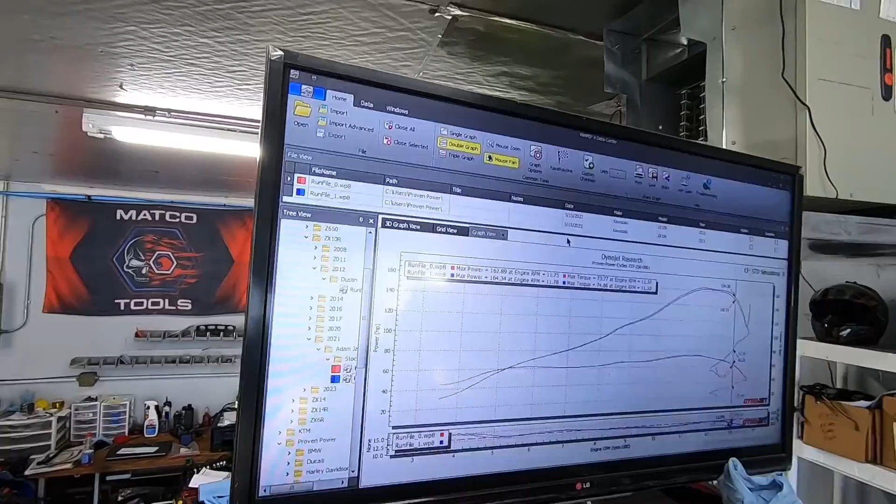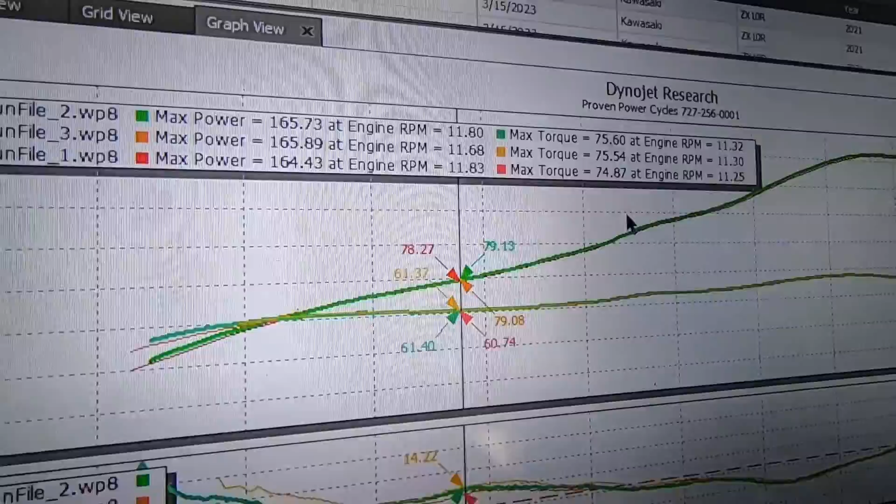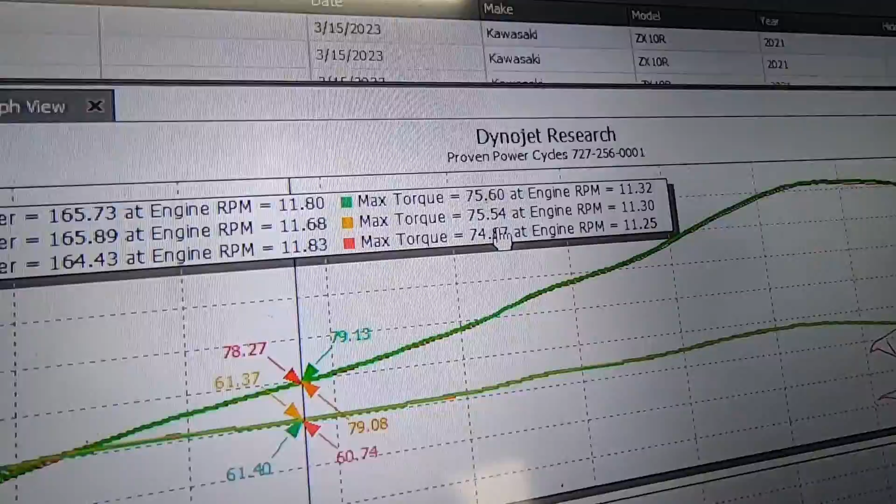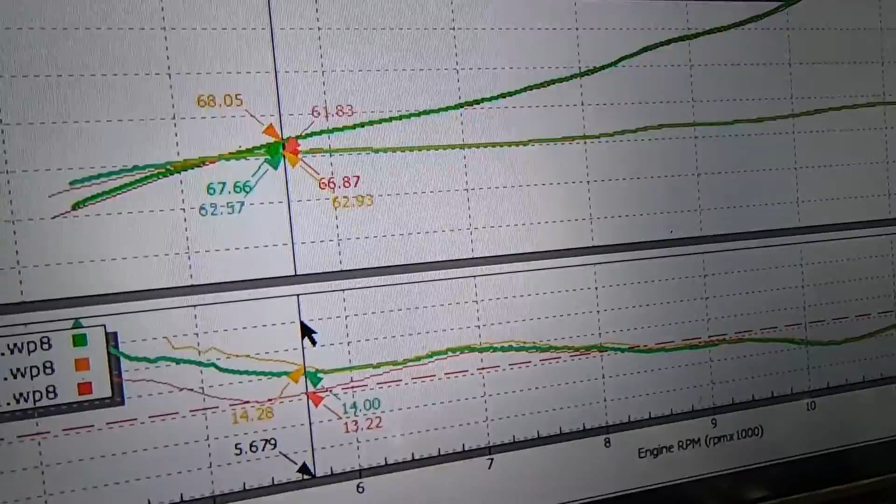We're done doing the baseline pulls on this thing. It actually ended up with 165, almost 166 wheel horsepower, and 75 foot-pounds of torque is about what we're averaging here. Not bad. Now take a look down low going into mid-range though. Look how lean the bike is. We're seeing 14.2, 13.9. Let's focus on the green and the yellow since that was the later pulls here that made the most power.

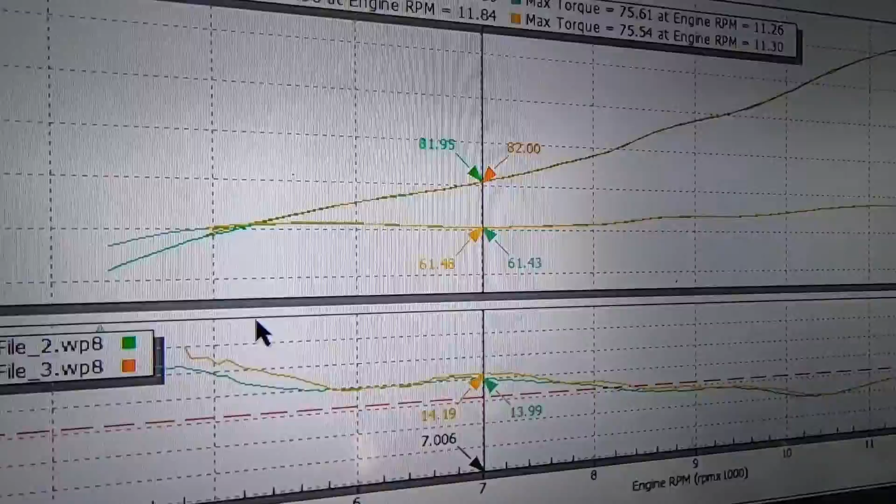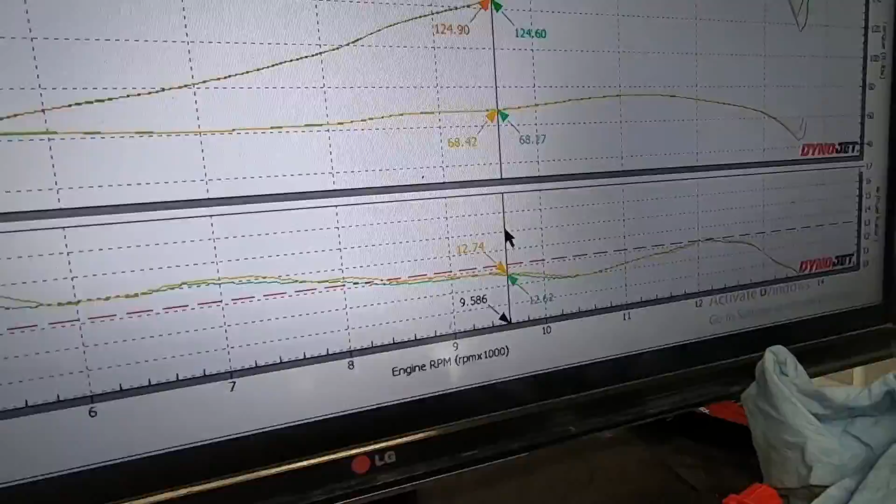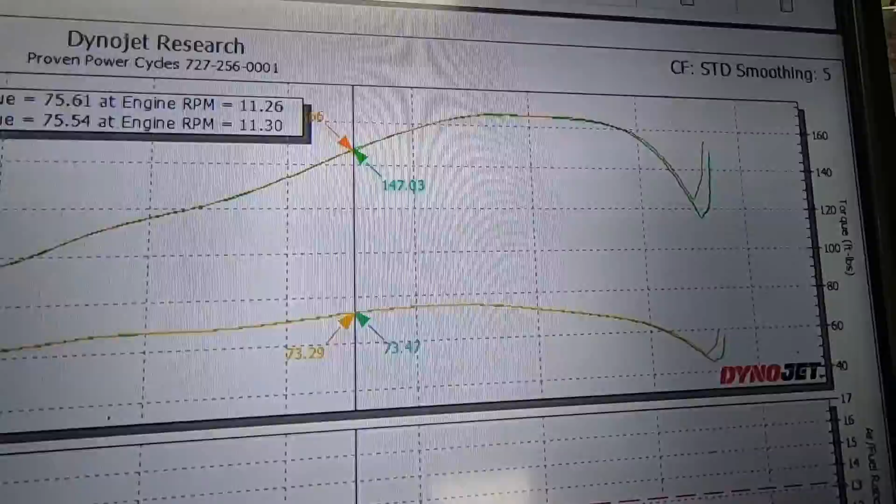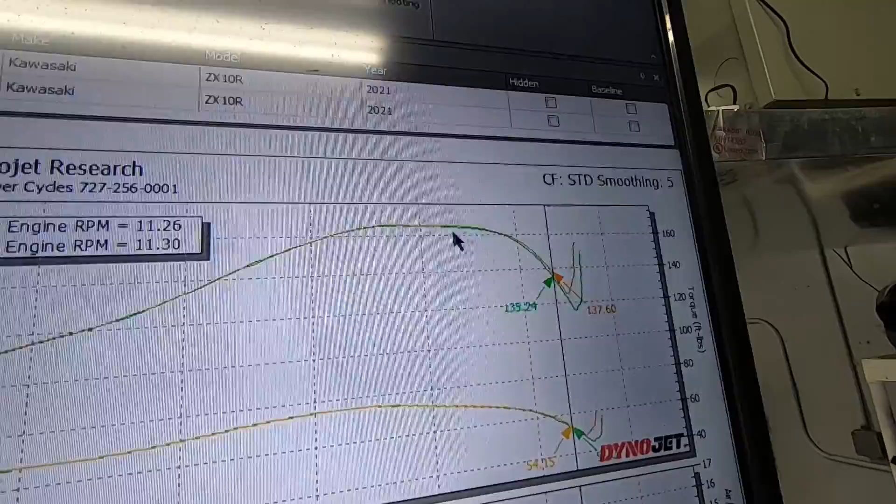Comes back up, gets right where it needs to be, and then again, it just starts puking fuel at the higher RPM, where also the throttle blades are getting shut simultaneously, and ignition timing, a bunch of stuff's getting restricted, so it just tanks the power. And that's why we get this little hilltop here, and then it drops off. It's just all the restrictions starting right around here at 11.5.

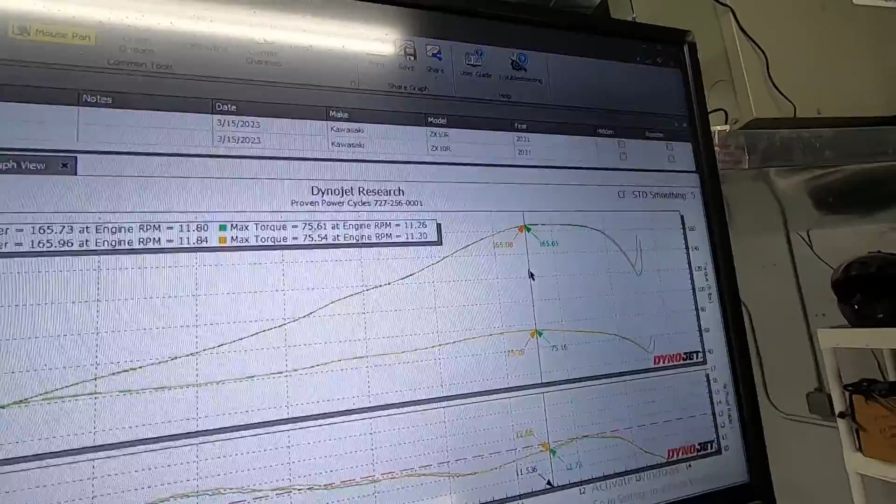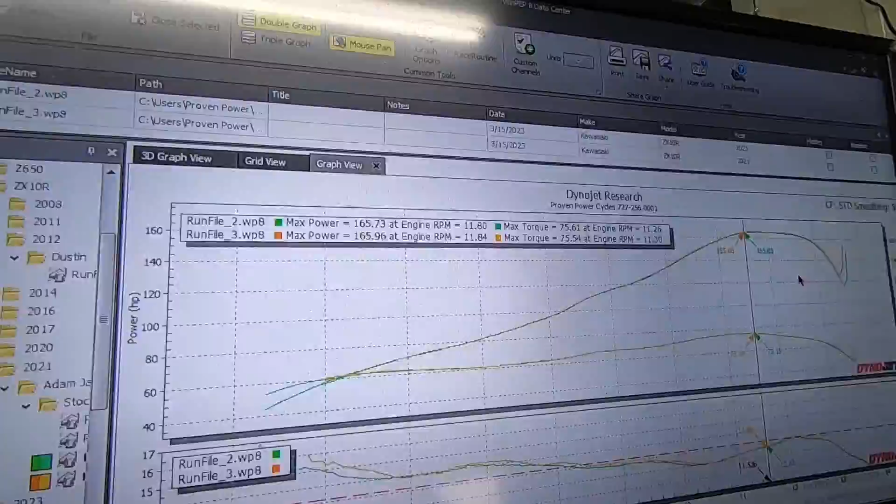So good numbers so far, a little lower than I was expecting or that I was hoping for. However, it's not where you start, it's where you end at. So stay with us. We're gonna transform these numbers for sure, and also we're gonna make this thing scream.

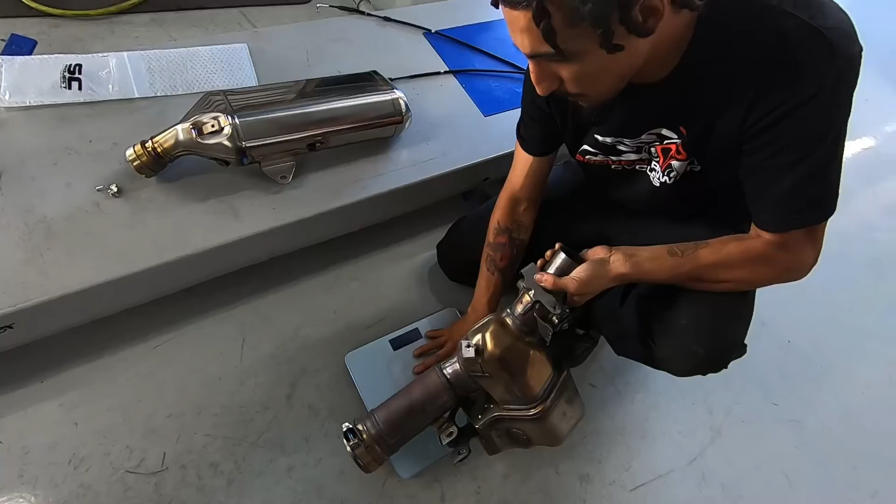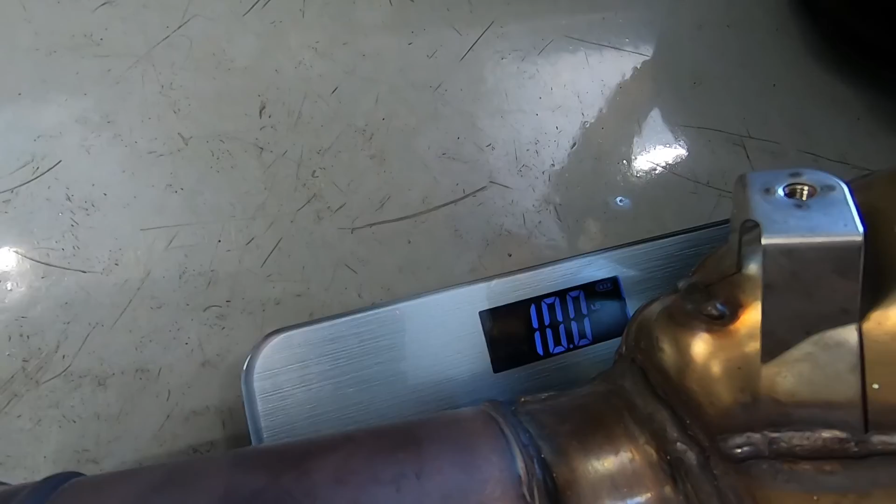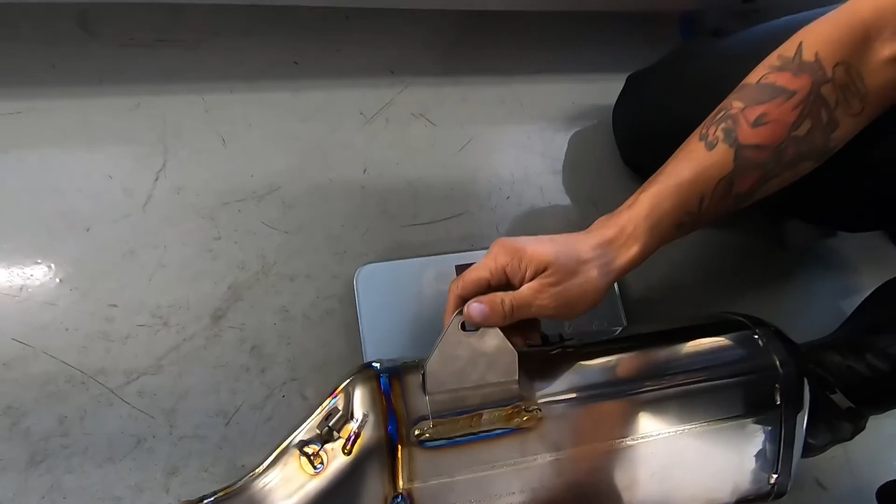So SC Project is a pretty loud exhaust. We thought it'd be interesting real quick to weigh the stock catalytic converter, and we are in at 10 pounds. So the stock cat weighs 10 pounds and we still have the muffler to weigh, so we're gonna go ahead and throw that on now. And here's the stock muffler, 5.8. So we have a total of 15.8 pounds. We also have the cables, a little bracket, and then we also have the motor.

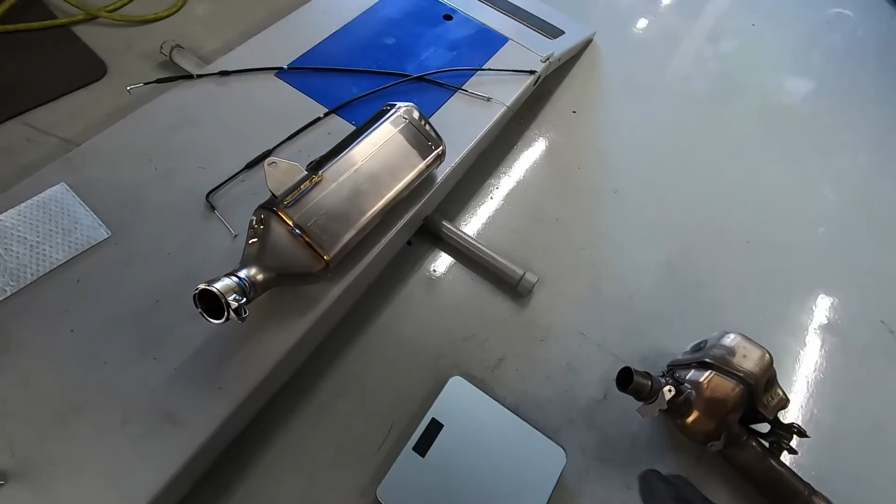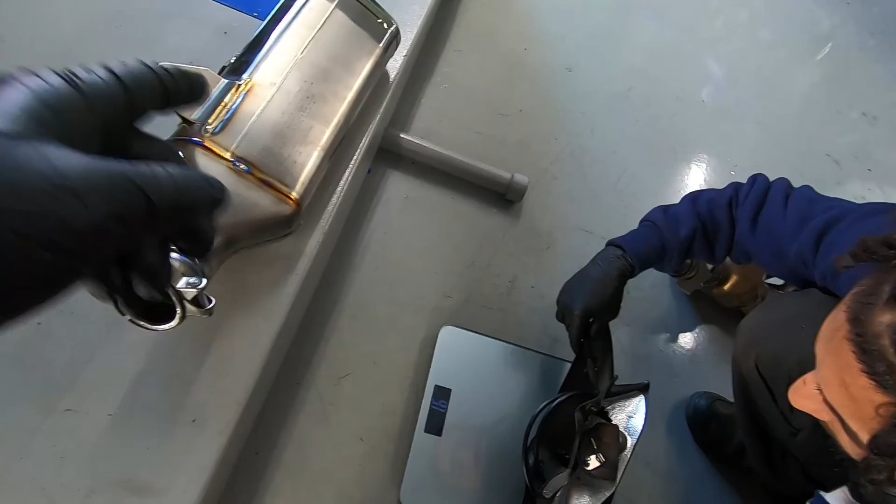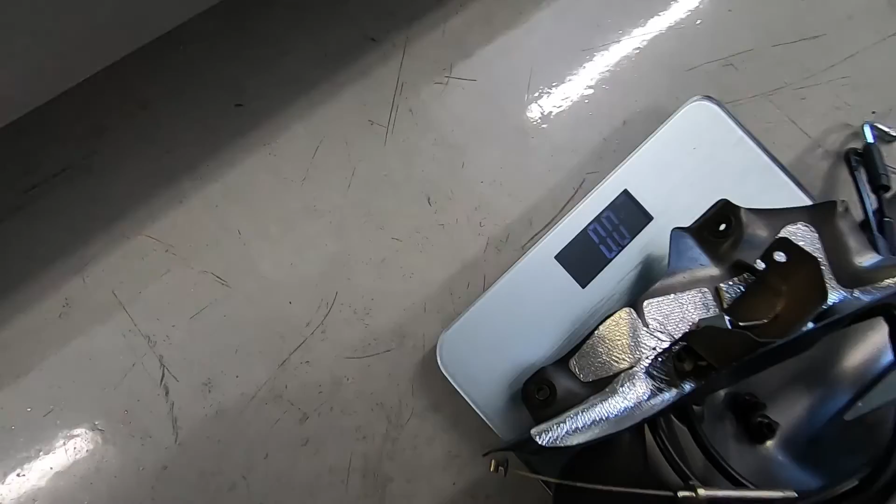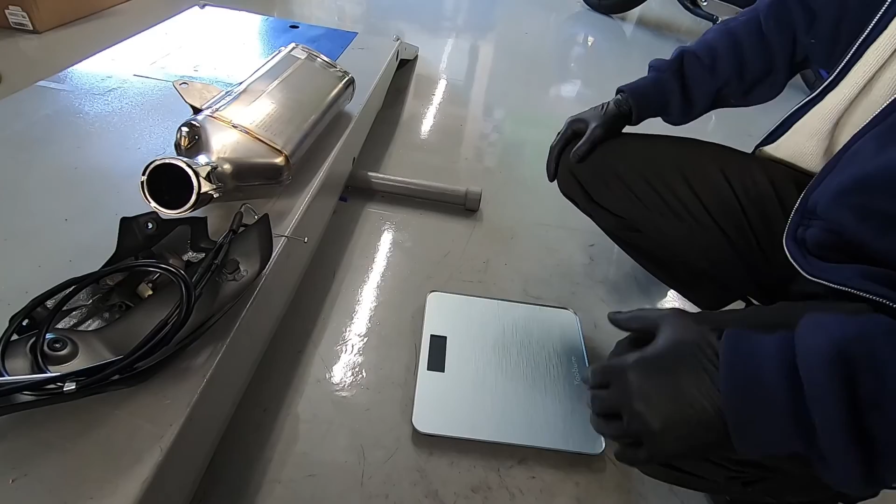So I'm pretty sure it's gonna be safe to say that overall, this is around 16 pounds, maybe even a little bit over 16 pounds worth of weight. We already measured 10 pounds on the cat. We measured 5.8 pounds on the muffler. And now we're gonna measure the rest of the hardware here. We're at 0.8, the battery's dying in it. We're at 0.8 pounds there as well. So you're at 16.6. So just a nip over 16.5 pounds that we have all right here.

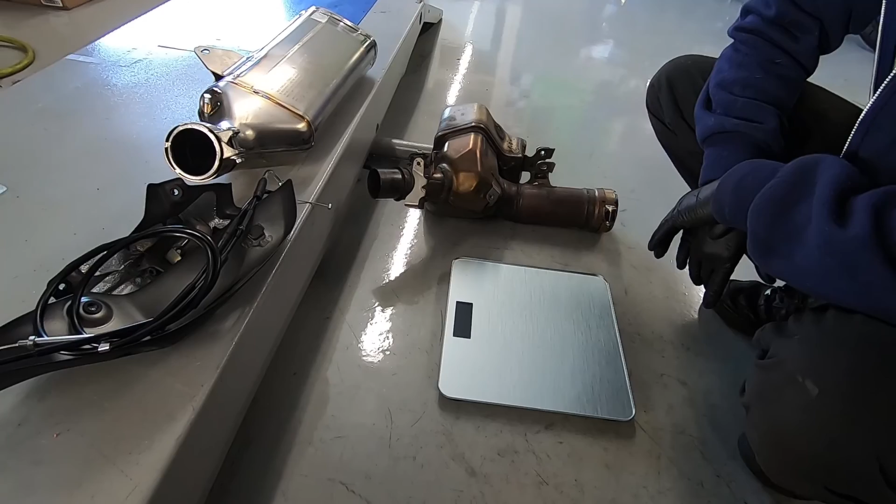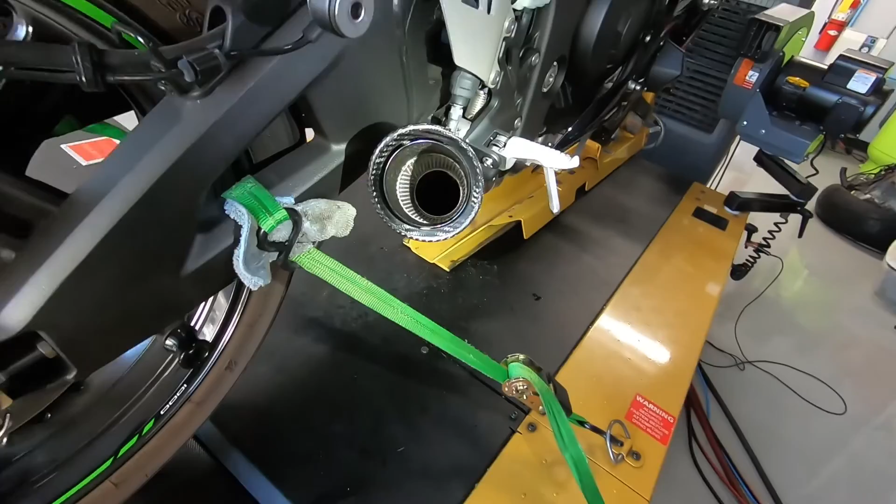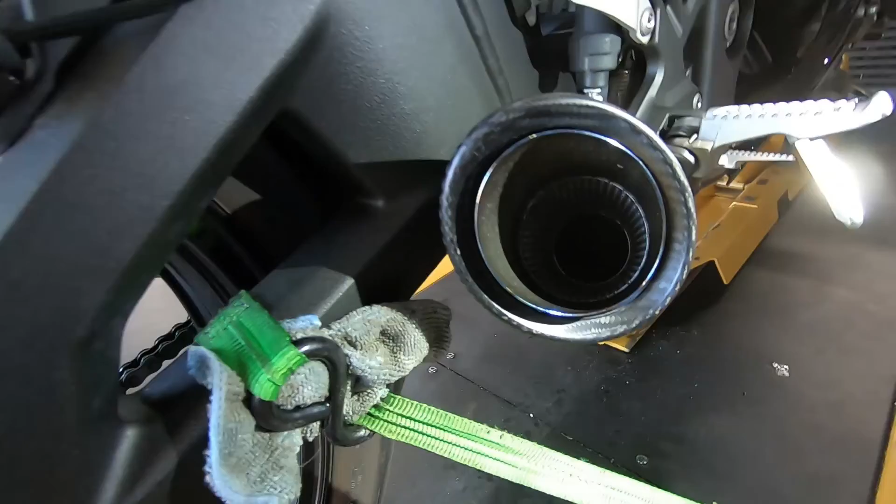That SC Project weighed in around a pound, total weight. So literally saving a good solid 15 pounds of weight right here, just on this little exhaust. That's wild. So this SC Project weighs less than a pound. There's literally nothing to this thing. It's a titanium slip-on, and there's literally no packing in here. This thing is going to be a screamer.

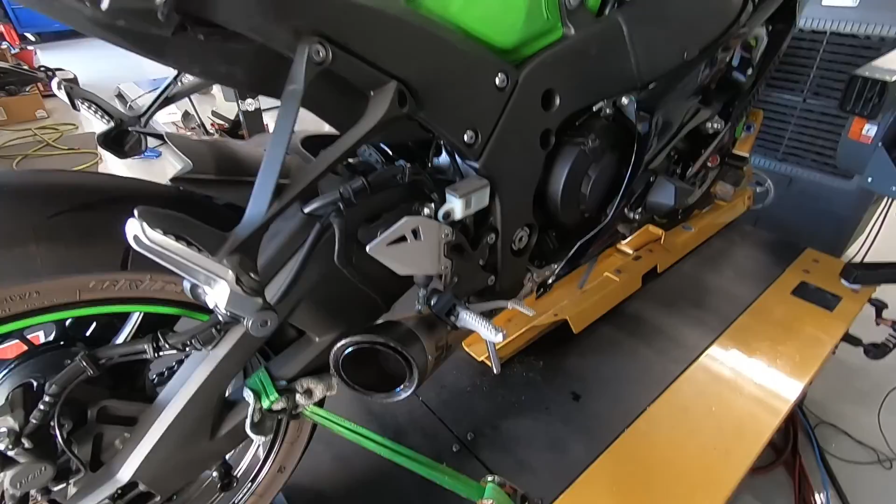Yeah, very, very little packing. It's gonna be a loud exhaust. That's what the owner wants. He wants it loud and proud. So we're gonna do another baseline pull with the SC Project installed, and then we'll start tuning it.

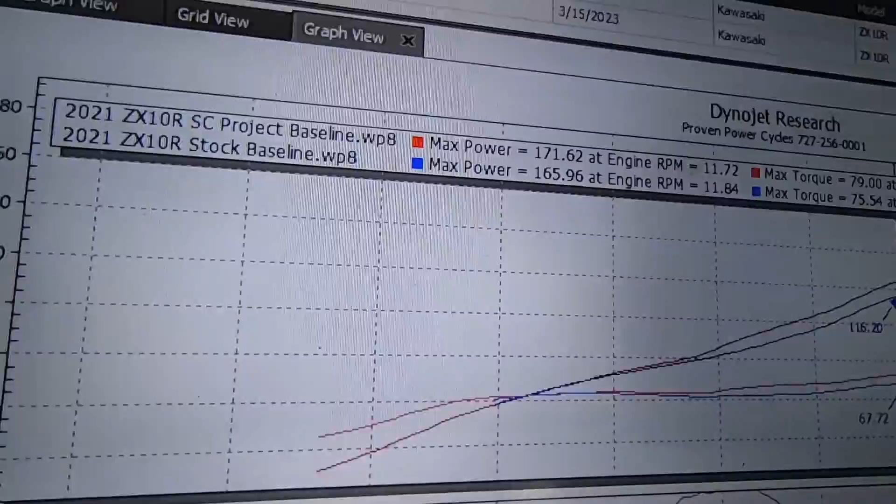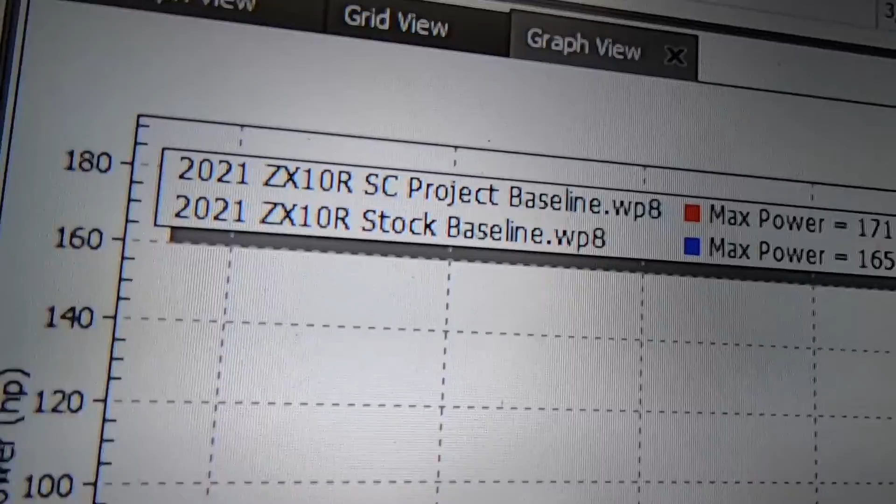Of the new baseline with the SC Project installed. Okay, this is with no tuning. This is just baseline. So we have a completely 100% stock baseline, and then we have the SC Project baseline, okay, where we installed the slip-on. That's the only modification that we've done.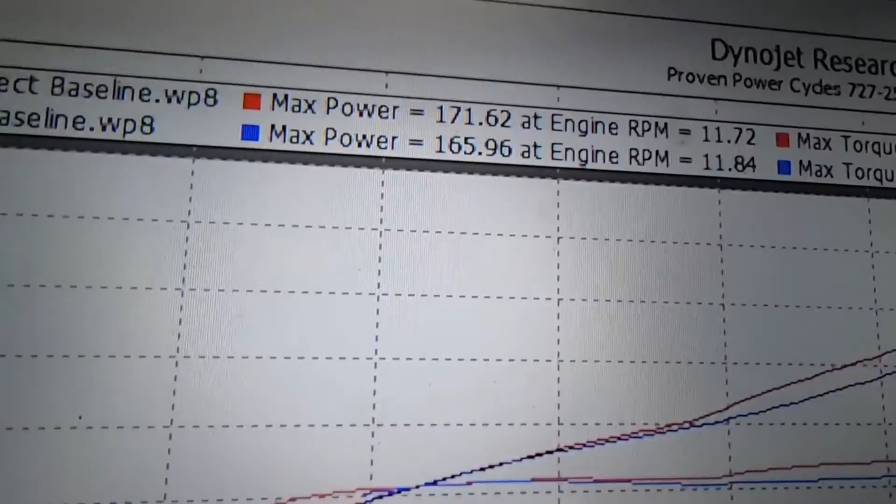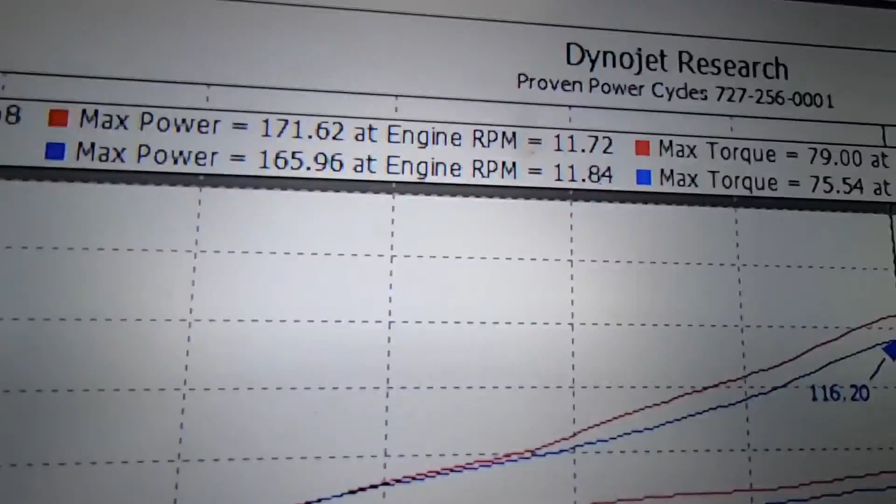Now, we baselined at basically 166 wheel horsepower with 75 foot-pounds of torque. With just installing that exhaust, we picked up about 6 wheel or so. We're at 171 wheel horsepower and 79 flat foot-pounds of torque. And look at the mid-range. We picked up very, very good mid-range and top end just by freeing it up with just that slip-on. Big gains, actually. We're about 8 wheel right here in the mid-range. That's pretty massive, actually, for just installing a slip-on.

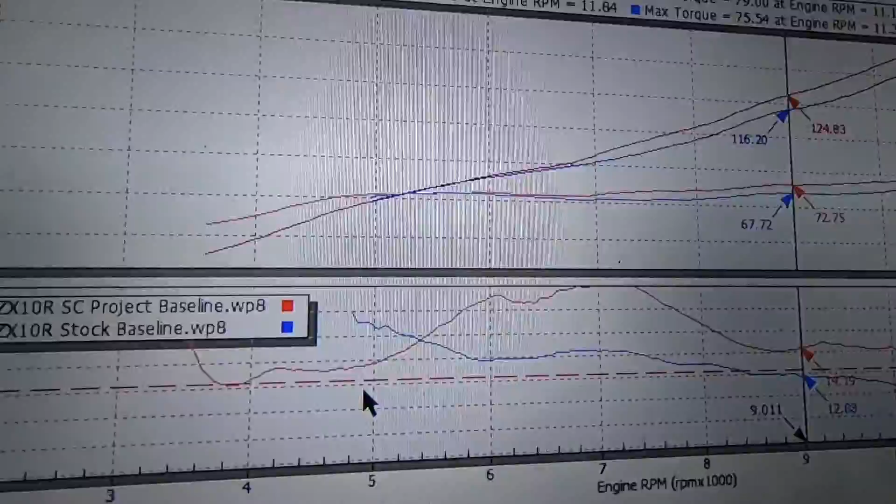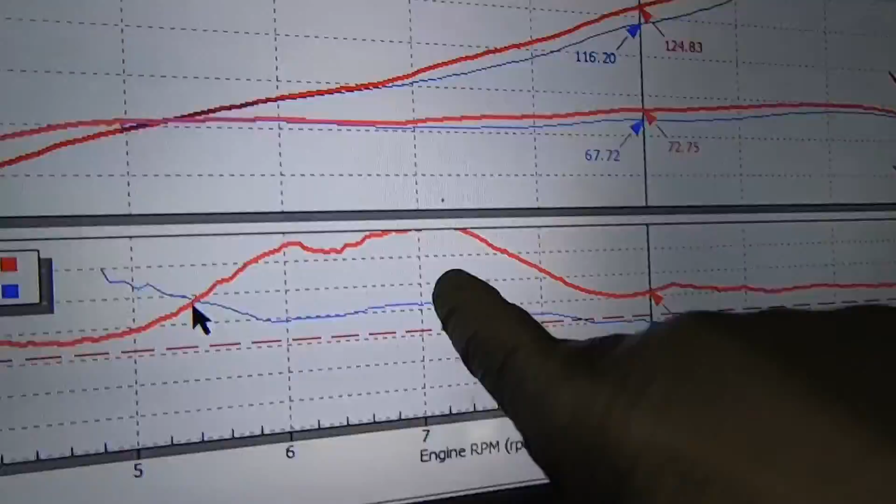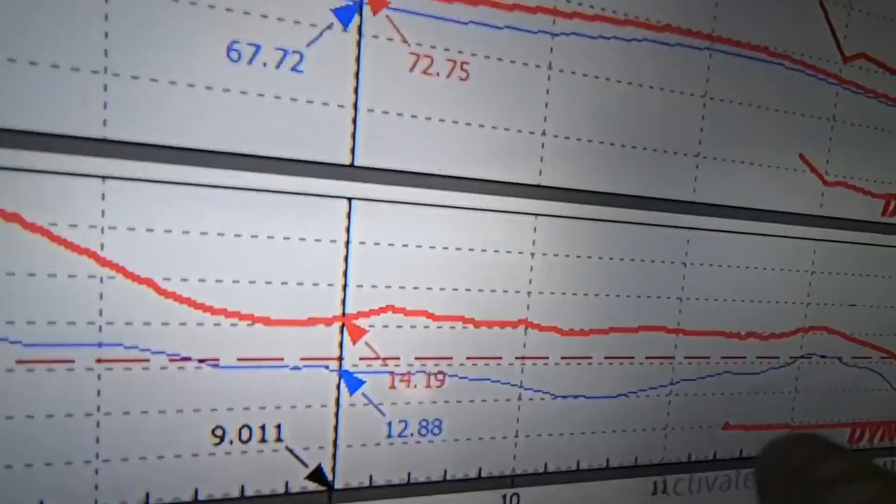But look at this here. This is what's interesting. Look at the air-fuel ratio now. The one that we just did is this red one, okay? We'll highlight it just so you can see it better. Look how lean we go. We go off the chart right here at 7K. It's completely off the chart. It's insanely lean. This is way too much airflow now, basically. What we need to do is actually really enrich it here. Again, all throughout this power band now, you're basically running extremely lean up until about 13,000 RPM.

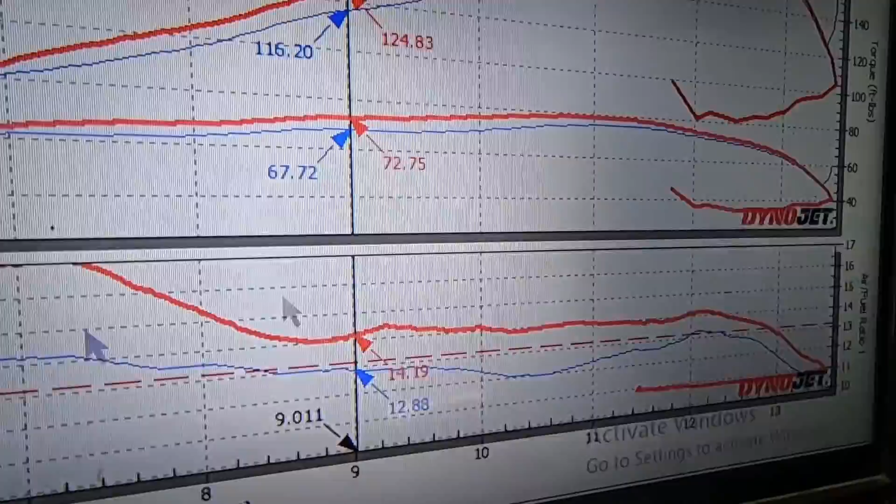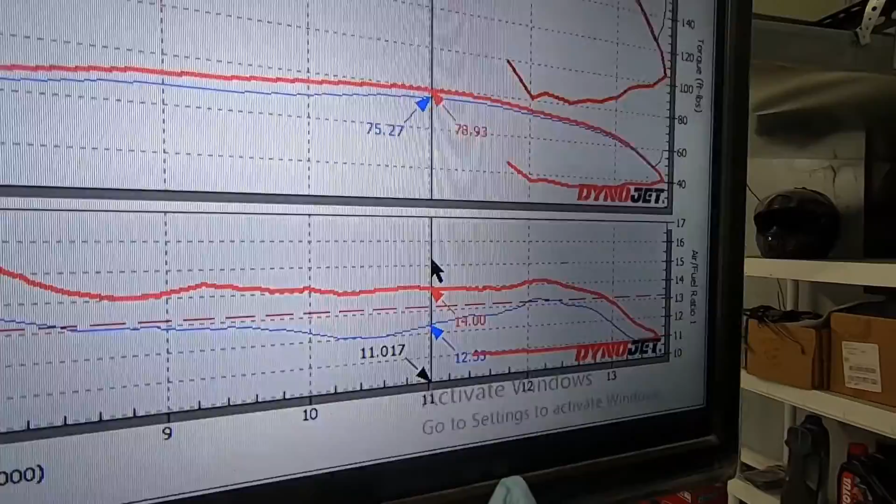Now this is basically, you're almost in the, no, you are in the danger zone even right here at 9,000, 9,200, 9,300. I mean, we're at 14.2 AFR, which is extremely lean, 14.1, 14.08. So again, we're almost at 14.1 all the way up until basically 11,000. Yeah, 14.0 all the way up to 11,000 RPM. That's extremely lean, and it even continues on to 12,000. That's extremely lean for the whole power band. This could cause some damage over time here to this motor.

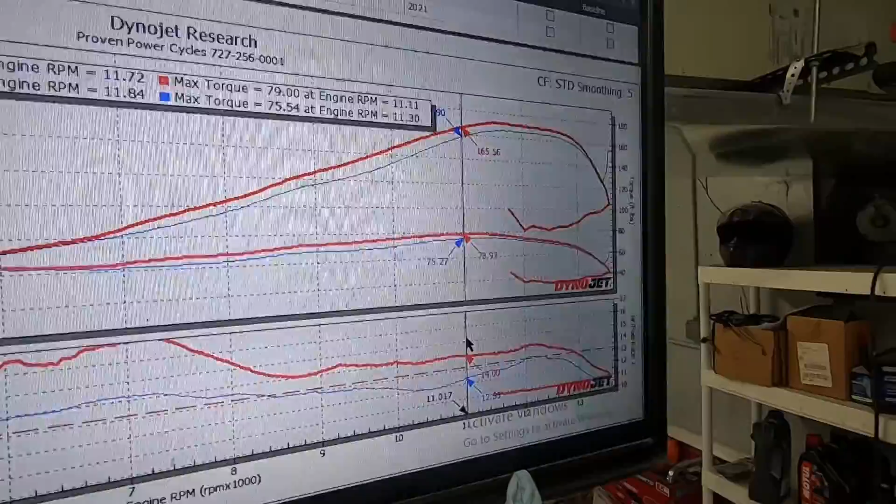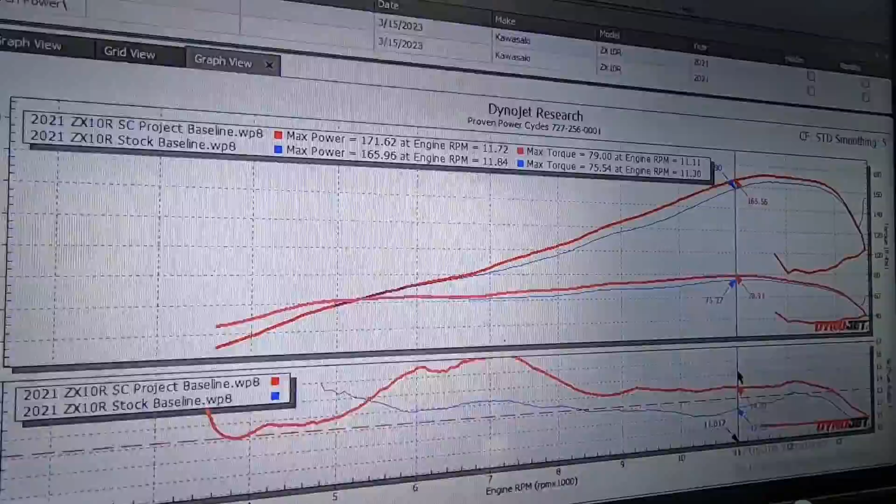So it's a good thing we're doing all this in one shot. It's going to save it. It's going to be a lot healthier, and it'll last a lot longer in the end run. So we're going to work on it now. We're going to do some ECU flashing, do some tuning, and we're going to start pulling the power out of this thing, all right?

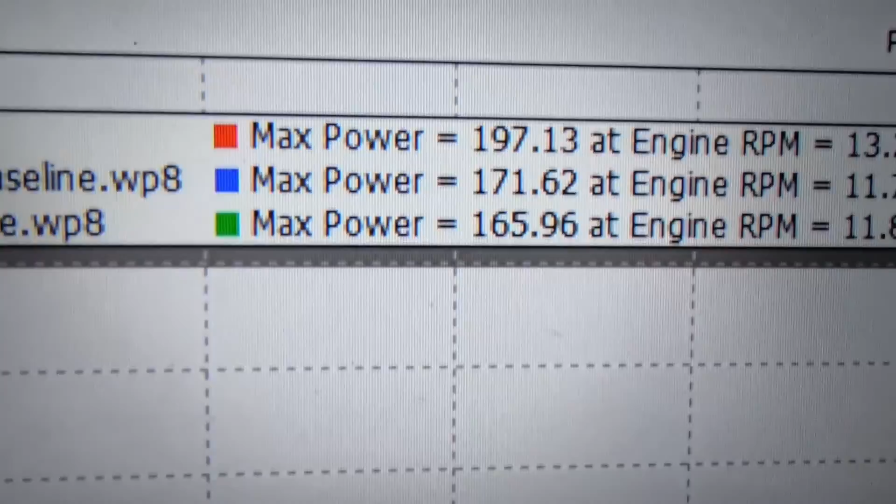So I'm not gonna lie, I am super impressed with that 2021 ZX10. This thing did killer, and all we had on it was a freaking SC Project slip-on exhaust. That's it. Insane. Here are the final numbers. I'm a little in shock, honestly. We ended with a whopping 197 wheel horsepower and 83.7 foot-pounds of torque. Holy crap. That is insane for a stock wheelbase bike. That's a lot of power.

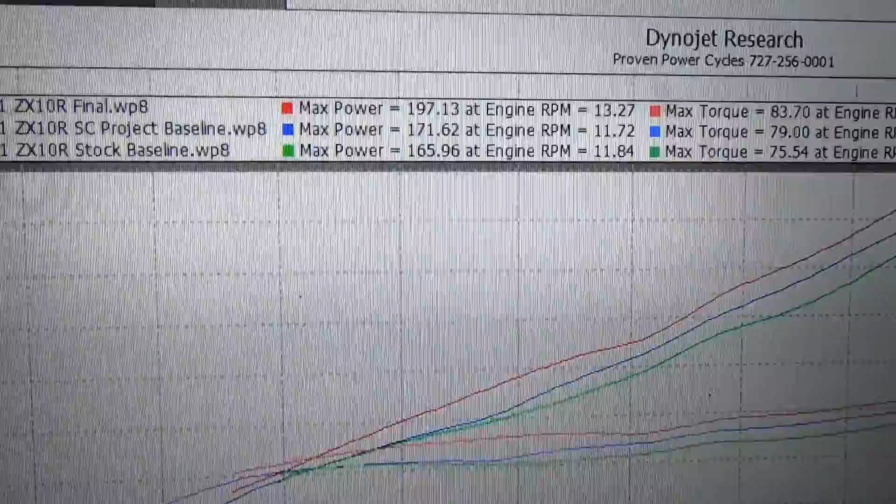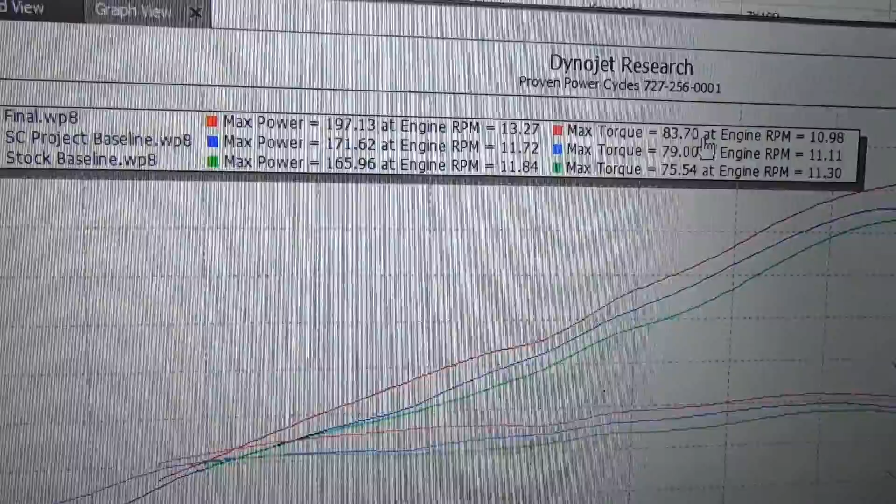Years ago, we had to do built motors, 2 mil bores, strokes, ported head, cams, all kinds of crap to hit this 197 to 200 wheel. So this is a stock motor ZX10, and we're easily hitting that with a slip-on pipe. That to me is just incredible to see how far these bikes have come over the years.

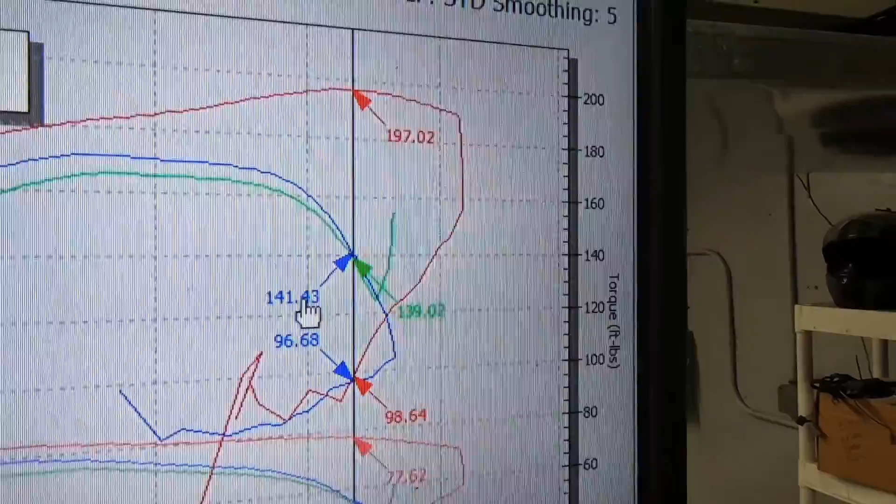All right, so let's take a look at the top end. Blue line is with the SC Project exhaust installed. Green line is 100% stock ZX10R, okay? And red line, obviously, is the full ECU flash and dyno tune. Now, this bike was tuned on 93 pump gas. It is nothing special. It's straight out the pump. So we started with 100.

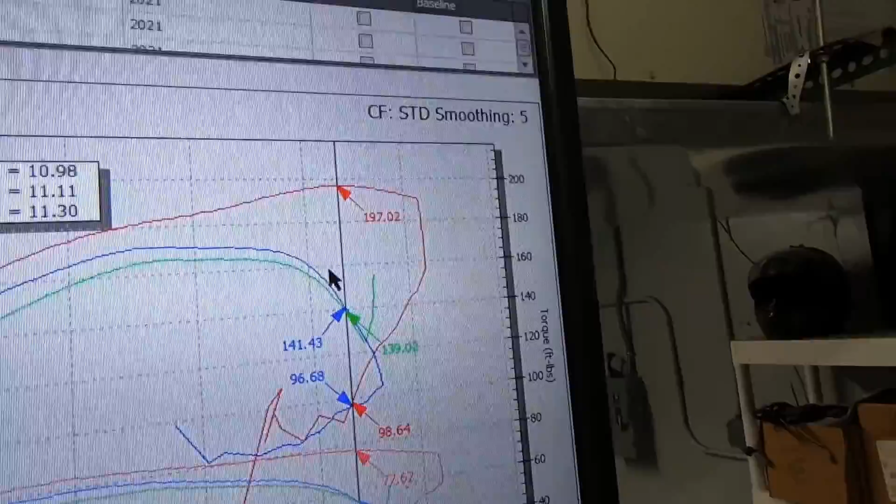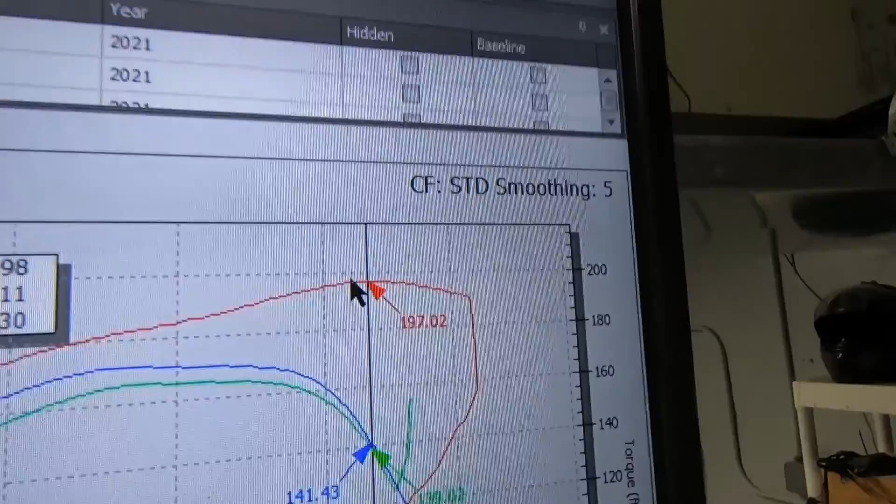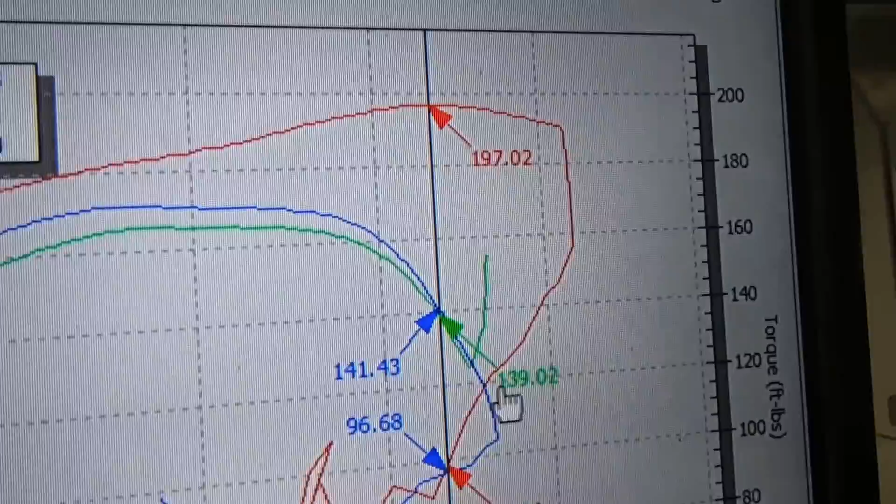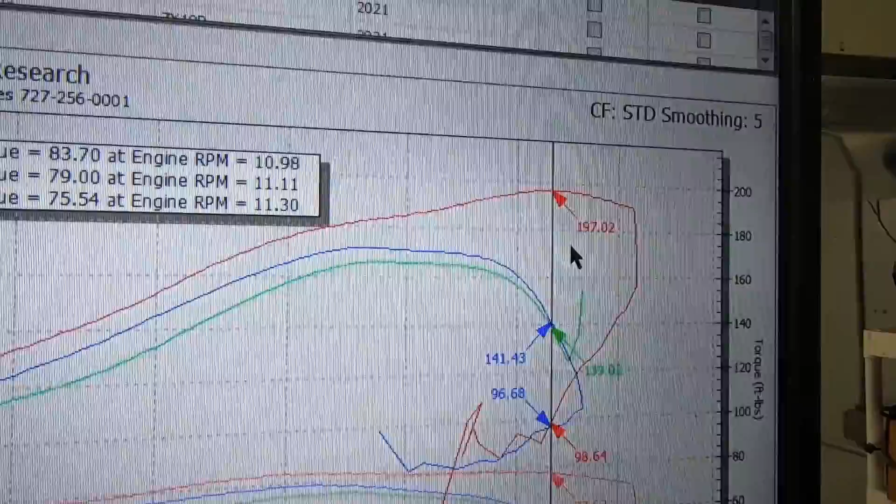Now, again, this is where the throttle blades shut down. I know. I just want to give you a reference point because, look, the new peak power is right around here. See how we kind of flatline right here? That is the new peak power, right in this range. So I targeted just right in the middle, as close as I could, just so we can get an idea. So when you compare, let's split the difference here. Let's say 140 wheel to 197. You're talking about a 57 wheel horsepower gain. That's crazy. That's freaking nuts. That's insane.

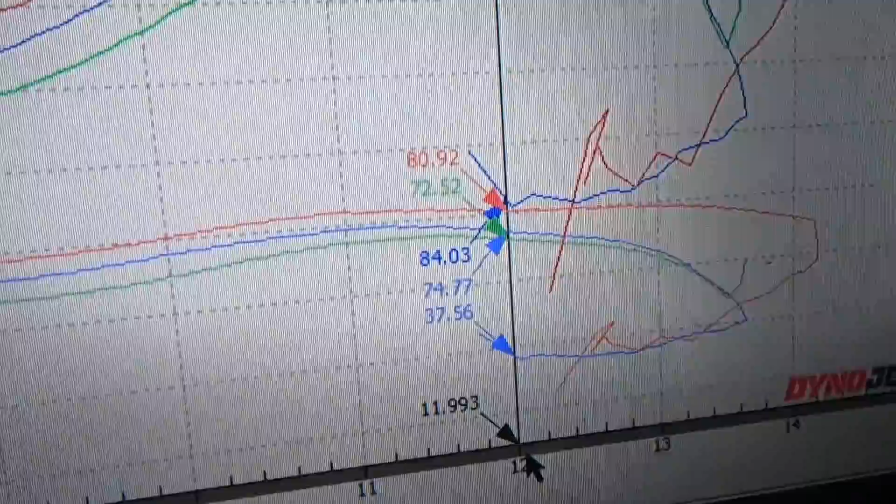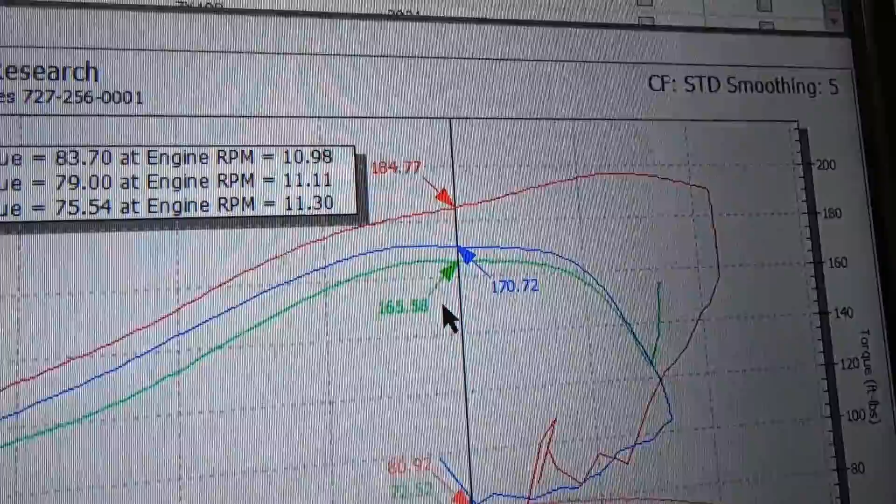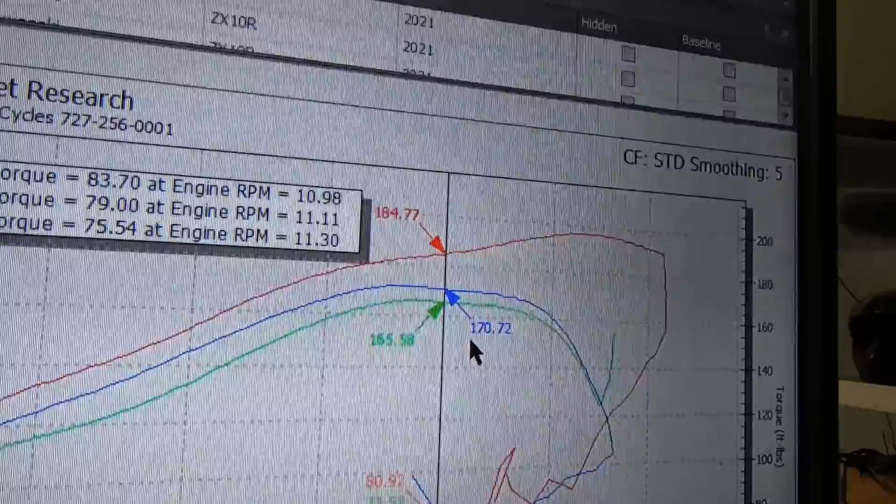That's just insane. Let's get something a little bit more realistic, something around where the throttle blades start to shut down, right around this 12,000 RPM mark. We scroll up here. Let's say even as the bike rolled in at 165, we're at 184. That's 19 wheel horsepower, which again is just monumental. Here's 170 with the SC installed to 184, so 14 wheel horsepower. Still, just again, huge gains, huge gains. And even down low.

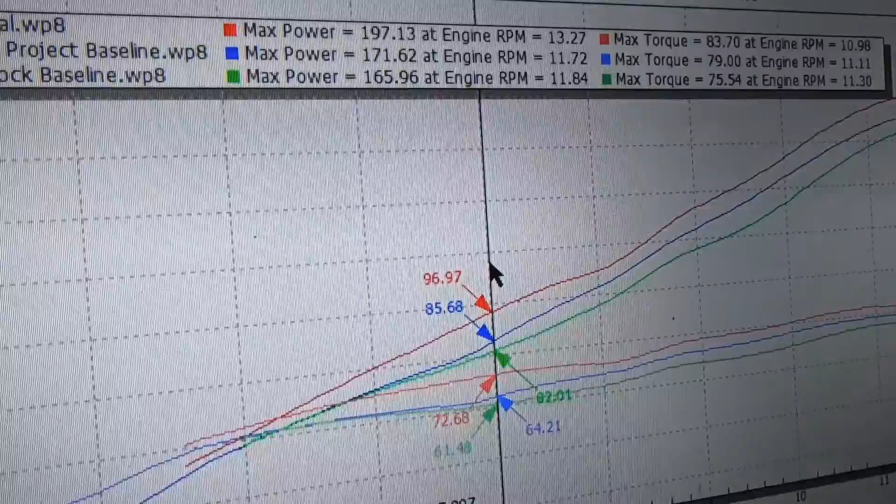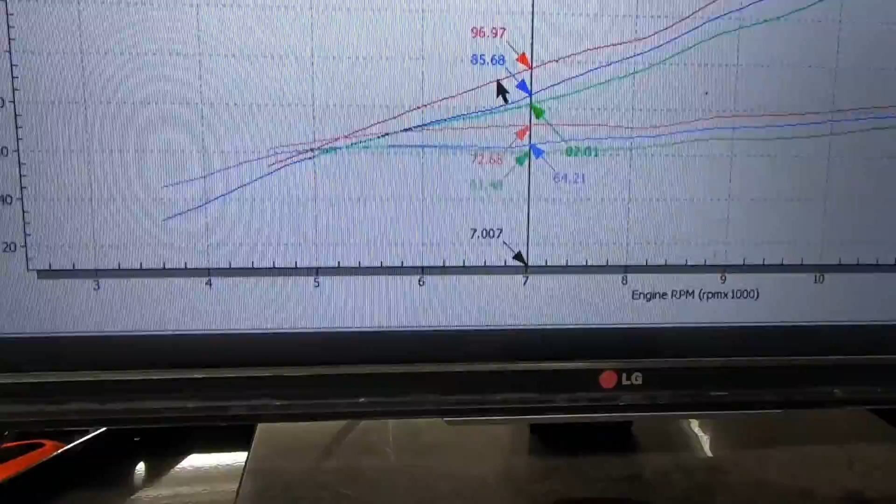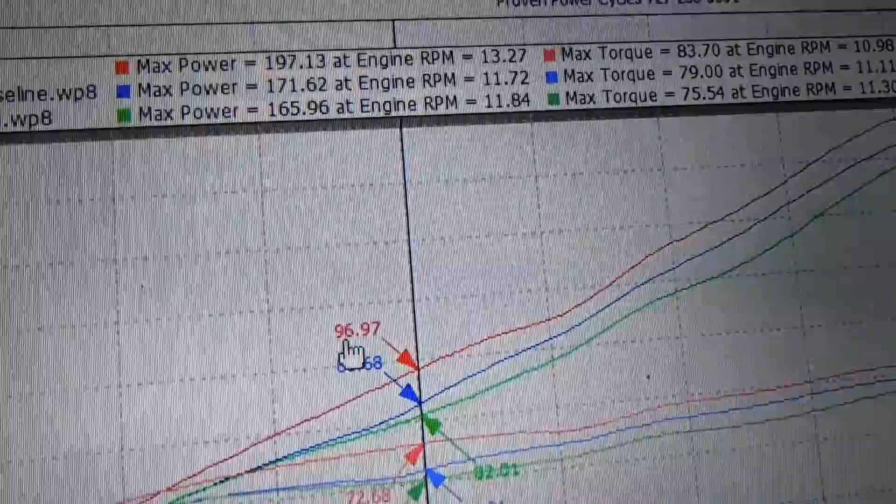And here's another example right here. We were at 82 wheel horsepower stock. We threw on the slip-on. We're at 85 wheel. After the tune, we jumped all the way up almost to 97 wheel right here. So you're talking about a gain of 12-ish wheel horsepower right here.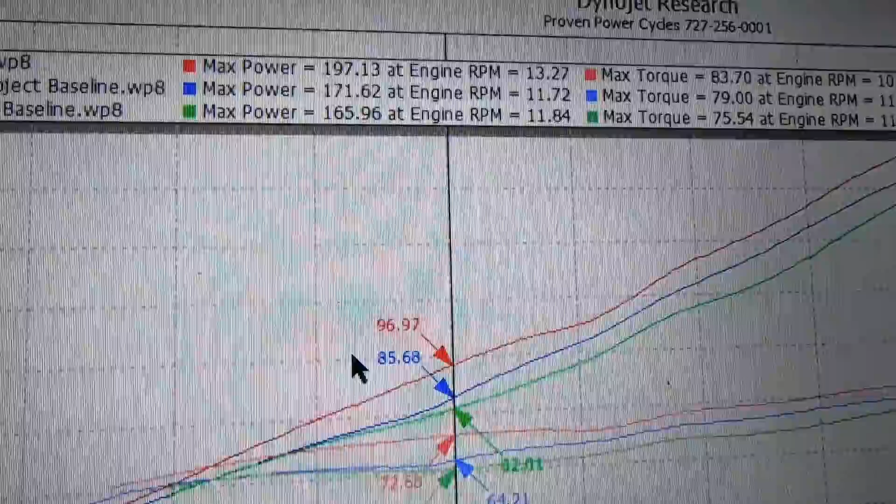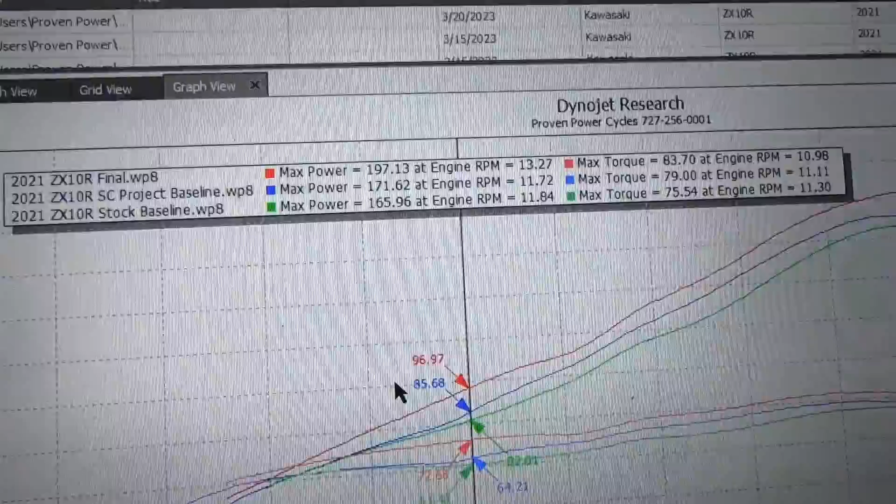And like I said in other videos, as long as you're hitting about 6% rate of change, you're gonna have a noticeable feel. Well, we are way past 6% at this point. We're closer to like 11 wheel horsepower gain down here. So that's clearly way over the 6% threshold. We're about double 6%. So again, 6% is gonna be very, very noticeable. He's double that. He's at 11 and a half, 12%-ish, right in that area. So that bike is gonna haul ass.

Now, here's the other side of that coin, okay? And this is another complaint that I hear about from a lot of customers. They don't like a twitchy throttle. They don't like it when they roll on. Some people do, but majority I've noticed don't. They don't like it that when they barely roll into the throttle that the bike basically just wants to giddy up and go like a bucking bronco, okay? They want a nice, smooth, on-throttle feel, right? And then they want power when they want to get into the throttle, okay?

And that's what we do. We fix that throttle, we make it smooth, and then we give it power when you request the power, okay? So we try to get that nice balance in there. Again, some people like it a little bit more touchy. They like it basically being full-on race bike, like you touch that throttle and it wants to go. A lot of other people, like I said, the majority that we've dealt with like a nice smooth on throttle, and that's what we target whenever we're doing a lot of our tuning, okay?

Even though we pick up power, we still make sure that that throttle response is nice and smooth, okay? It's very important. I take that to heart. I hear a lot of feedback on it, so I strive to make sure that we hit those marks for our customers. So I really hope you enjoyed this video. I really hope you gained some value out of it.